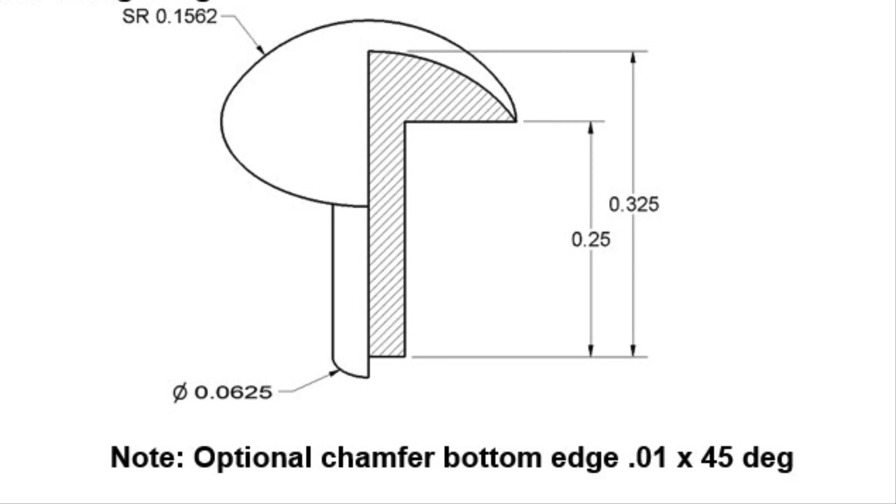Good morning. We're going to make the linkage peg now. Part number 8.

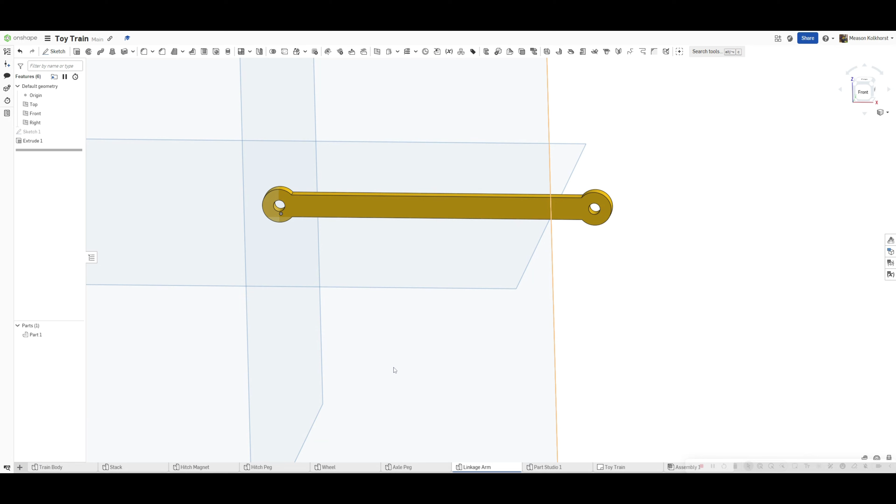Plus sign, create part studio. And it's a round piece, so we are going to revolve it, which means I'm going to draw just the outline of half of it.

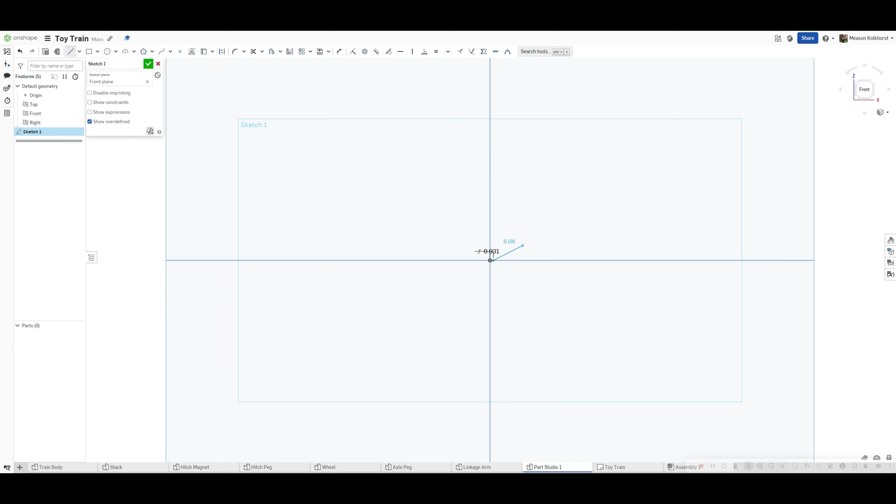So I'm going to start at the bottom here, click, go sideways, half of the bottom diameter. So it's 0.0625 divided by 2. Wow, this is going to be really tiny.

I'm going to go up, and this height up is 0.25. And then I'm going to come out, and I have no idea what that is. I'm going to have to look at the surface radius. I'll deal with that later.

Click. And now I'm going to turn my tool off, turn the tool back on, do the center line, click. The total height is 0.325.

Okay, so now I have a little bit of a problem. I need to figure out what that distance is. And the only thing it tells me is the surface radius. So here's what I'm going to do.

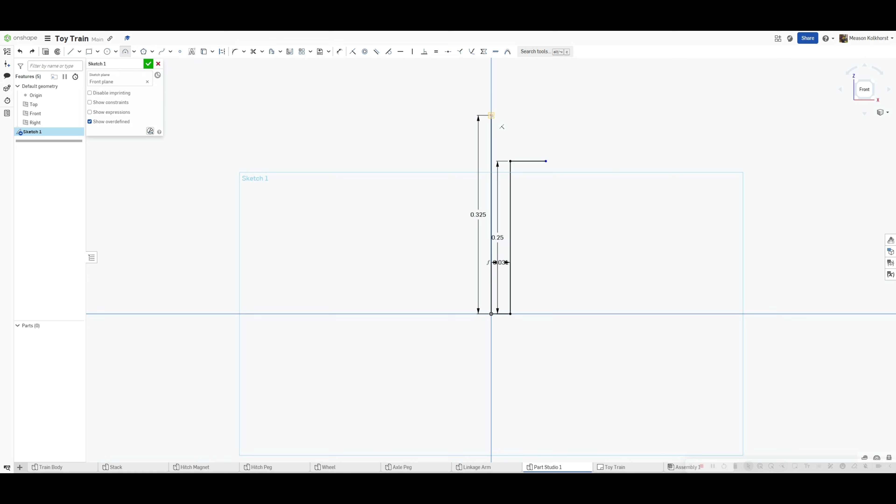I'm going to start with my 3-point arc. I'm going to connect those 2 points and set it down. And now I'm going to type in my surface radius, and it's 0.1562. Enter. Now, obviously, it's still in blue.

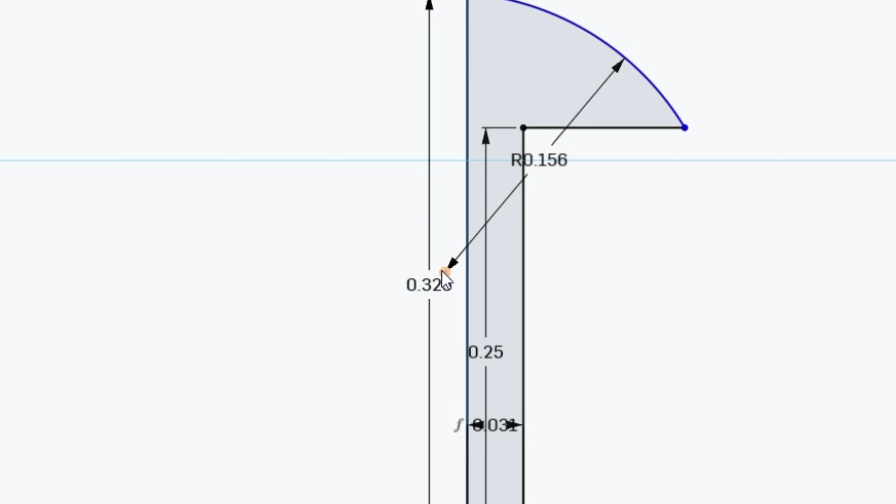We have a little bit of a problem. Turn my tool off. And this dot needs to touch that center point. And as soon as you do that, everything locks in. Everything's in black. Everything locks in.

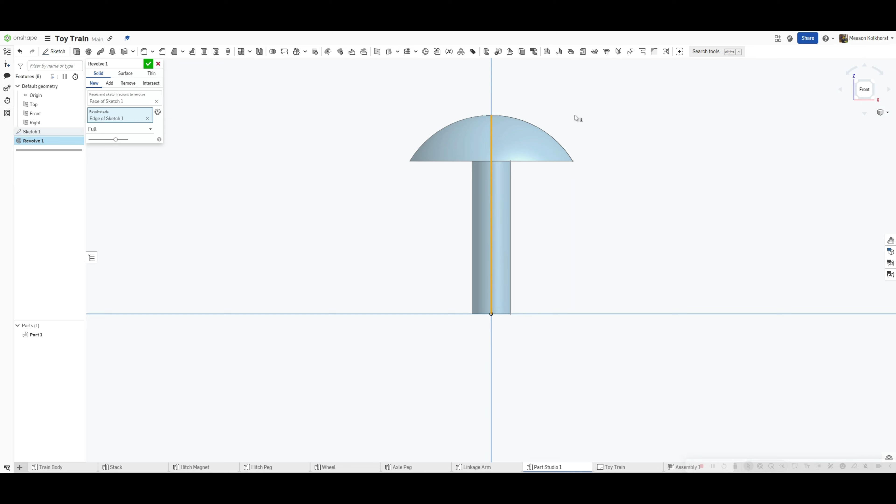Green check mark. I'm going to revolve, choose my shape, choose my revolution axis. And there it is. And there's that surface radius looking like it's kind of flat on top, like it's a flat little nail.

Here's the problem. If you don't move your center point and line it up on that center axis, this is going to look weird. There's either going to be a dimple here, or it's going to look more like a rocket cone. So we want to make sure that you have that last little step there as you're making this.

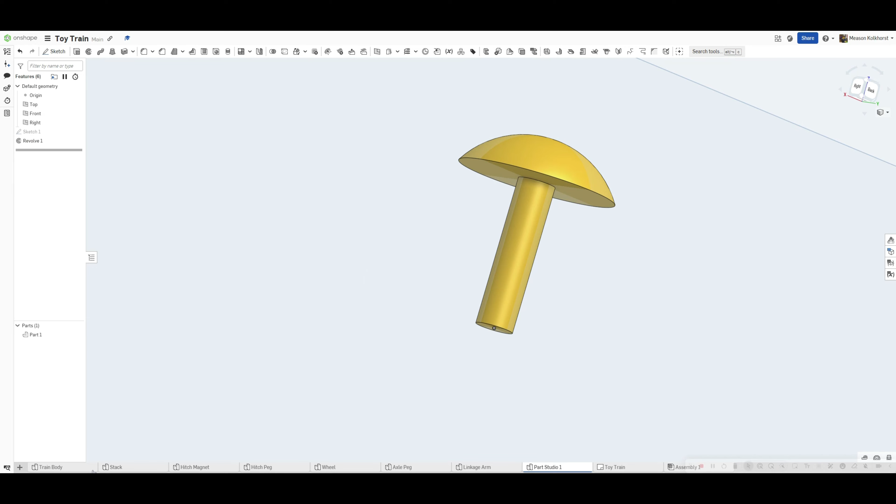Okay, we're done. Going to change some colors. Tap, tap. And we're going to change it to yellow and green check mark because I like yellow and it's okay. And I think it will match my train body. So there we go. Okay.

Oh, and I need to rename this guy down at the bottom. Rename it Linkage Peg, LINKAGEPEG. Don't forget to rename your part on the side over here. LINKAGEPEG. And it's done. Good luck on the rest.